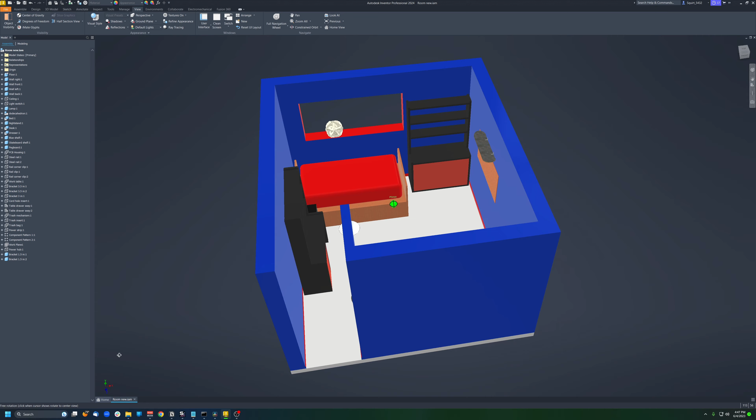Now I have actually modeled out this entire room in Autodesk Inventor, and I've used that for several purposes, but one of the biggest ones is figuring out how to design this thing.

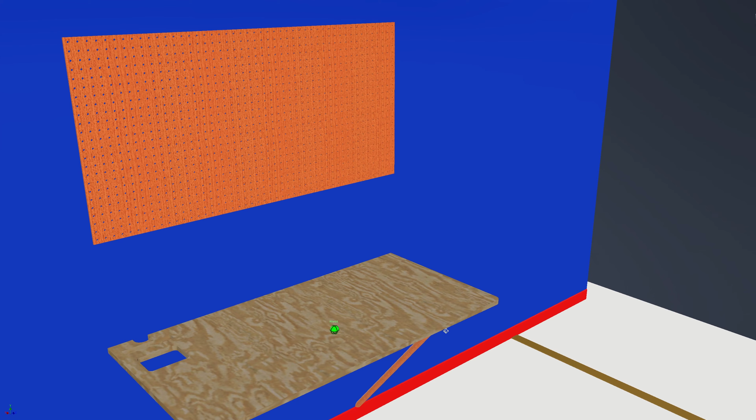I gave you a little teaser of this in my 2022 update video, but here's a little more in-depth look at the plan. Ultimately, I'd like to just leave the pegboard where it is on the wall, and then use a big piece of plywood with the exact same 2x4 foot dimensions as the pegboard for the main work surface. And then to maximize the space around the table and on the floor, I can mount it directly to the wall and then put the legs at a diagonal with the bottom just wedged into the trim here.

Making sure everything is drilled into studs, of course. And the model here is accurate to the measurements I took for where the studs are on the wall.

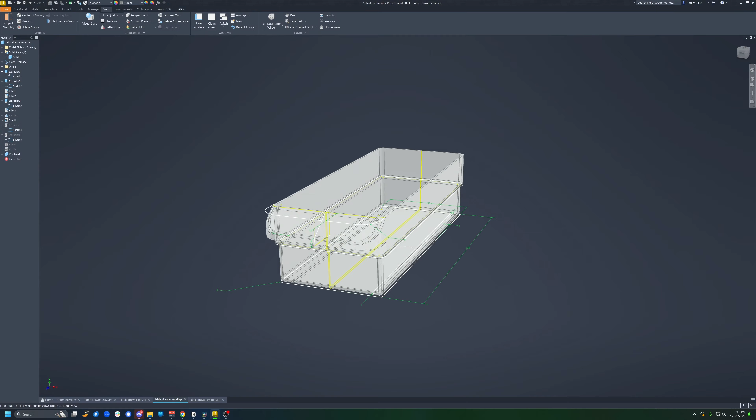I then found these great drawer systems on Amazon, and I had to get these in the model, so you know what time it is now. It's time to make an unnecessarily detailed CAD model.

So now that we've got these looking gorgeous, we can just plop them in here and make the table just the right height so that they fit perfectly flush with the pegboard.

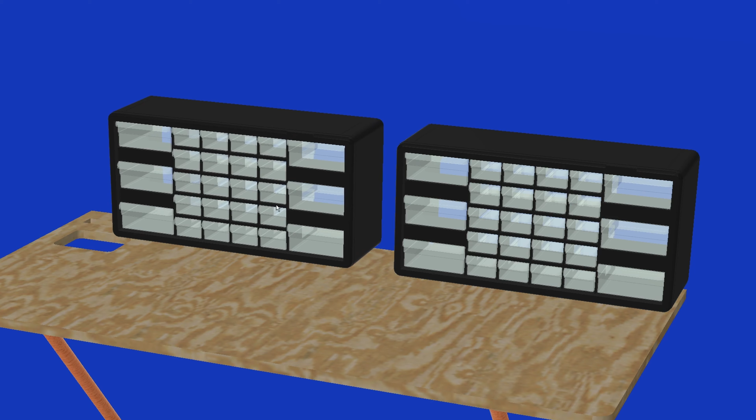Now, horizontally, these don't actually fill up the whole back wall, but if I smush them to one side so they're all nice and flush here, that leaves a nice little space for a cutout here.

So the plan is to have just a big hole in the table with a mini garbage bag in the bottom that I can just sweep trash into from the whole table.

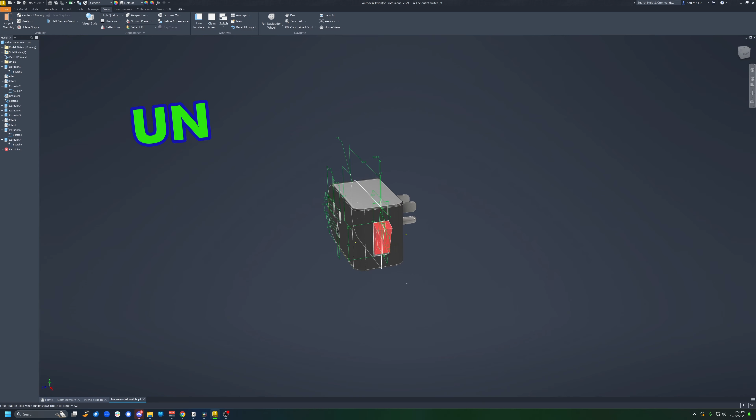And then behind that, I want to have at least 4 power switches to control things like lights and power tools. I found these little switch blocks on Amazon, as well as a power strip that should fit them perfectly, as shown by yet another unnecessarily detailed CAD model.

This seems safe, right? And each one of the switch blocks is going to go to one of these right angle adapters so that it can be pushed as far back as possible.

And I'll also have a semicircle cut out in the very back so that I can thread cables through it, and one of those is going to go directly from the power strip to this power hub, which I can mount to the wall to be more accessible for non-permanent things. That looks like a plan to me!

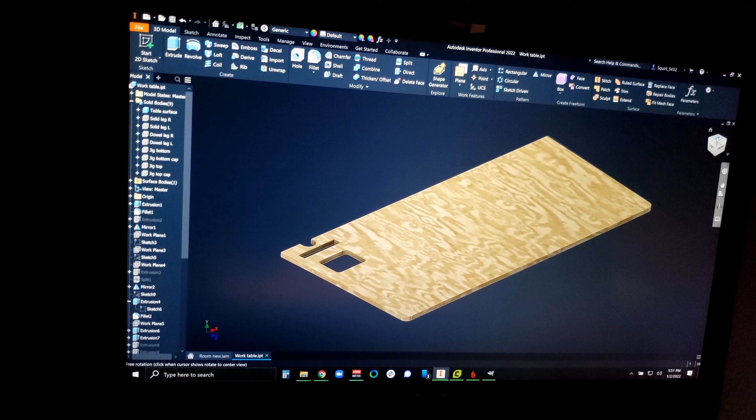Now the first step here is going to be that main cutout, so let's just screenshot that from the model, put it into GIMP to remove the background and make the outline black, then put that into Google Docs so that I can make sure to print it at the right dimensions, which I can just take from the model here, and transfer that number over to the dimensions on the image.

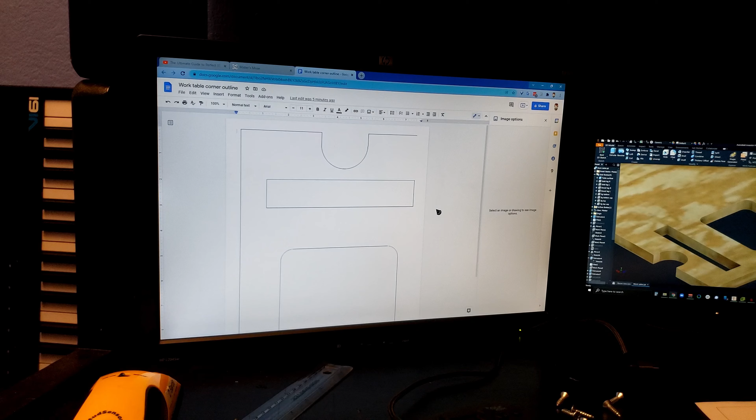And there we go! Now let's cut some things! That's actually a really nice curve.

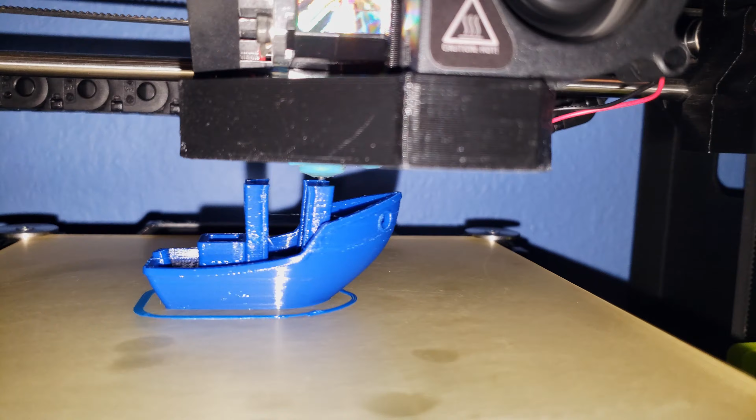Something else I mentioned in my 2022 update was that my 3D printer needs work again. Hopefully it'll be easier this time. Thankfully, it was in fact easier this time. If you're wondering what I mean and how it went last time, you can watch the video I made on that, where it was such an ordeal that I made an entire music video to recount everything. But for now, I can finally use it to print the mechanism for the trash bag under the table. I went through a few iterations of this mechanism, but finally ended up with something that slides in beautifully, slides out beautifully, and you can just put a little doggy bag in here and wrap around the edges, and that fits perfectly. It's amazing and I love it.

So let's start assembling some things on the actual table.

It was at this moment that he knew.

Wait, frick. I didn't mean to go all the way through. Future Davis here, just interjecting to say that mistake did actually make it to the final version because I couldn't be bothered to fix it. Back to you, past Davis, you idiot.

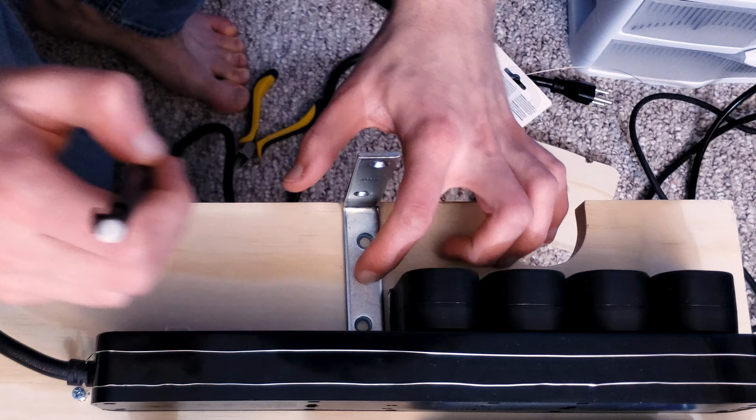And that, kids, is why we measure everything to the tenth of a millimeter. Look how beautiful that is. Oh, I love CAD modeling.

That was terrifying.

Now that pretty much everything is in place, I want to test the strength on this thing, so I did a bit of a weight test to make sure the table itself is not the weak point here. I think it's safe to say that's a success.

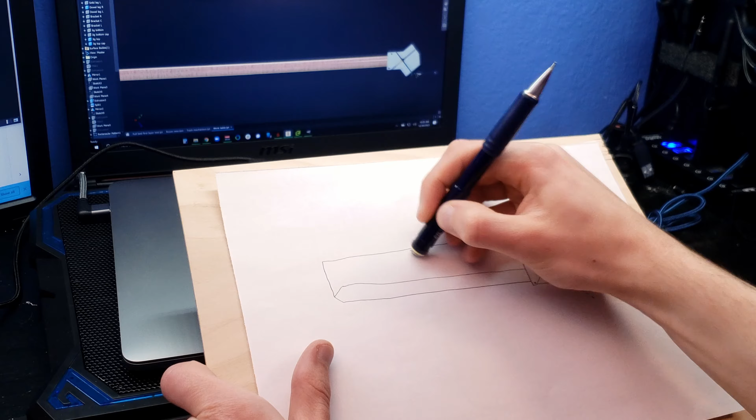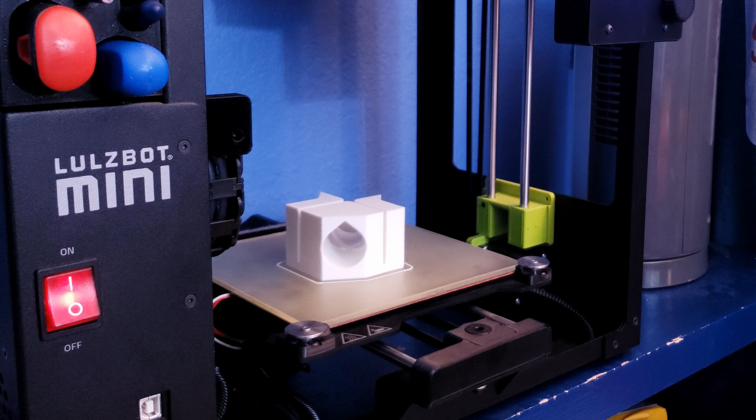With that done, it's finally time to move on to the legs. I'm just going to use dowel rods for these, but the ends need to be cut at a very precise length and at very exact angles. There are tools that would make those cuts easy, but I don't have them. I have a jigsaw and a 3D printer. What do you do when all you have is a jigsaw and a 3D printer? You 3D print a jig for the jigsaw.

Not too shabby. Now it's time to mark some things, drill some holes, and get this whole thing on the wall.

And now, please join me in getting every telescopic thing I own to use as a jack to hold up the table as I mark the holes and get stuff mounted and everything. Because since I'm mounting it directly to the wall, it basically needs to be suspended mid-air so that I can mark the holes. So, DIY suspension rig, or whatever that could be called. And now, quite possibly the trickiest maneuver I will pull for this entire project.

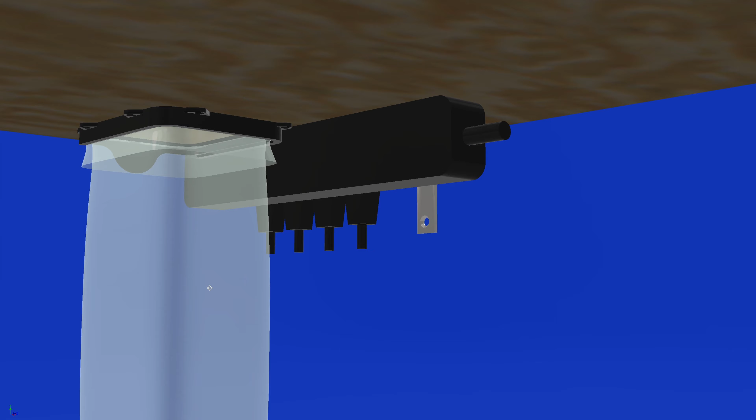Once I make sure the table is actually in position, perfectly centered and perfectly level, I can mark those holes in the brackets where I need to drill into the wall. Now the tricky part: I could drill those just in place, and those two would be fine, except for that one, because the power strip is in the way. So I think I'm going to need to place the brackets first, then put the table back on top, and screw in the brackets from the bottom.

Yeah! First order of beeswax. Let's get this back on the sawhorses where it belongs. A bit more stable. Yeah, boy! And now we drill some holes.

Alright, moment of truth number one. Success! Now the real question is, do the brackets still line up with the table?

It was at this moment that he knew. Note to self, that is not load bearing yet. Frick, frick, frick, frick. Back up.

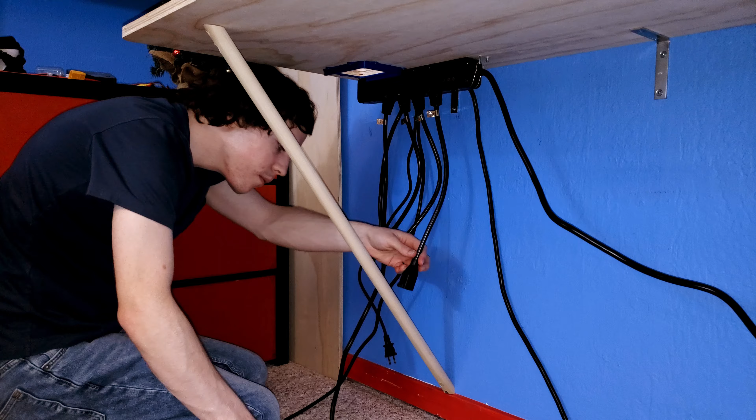So as I'm plugging things in here, the idea is I can have stuff on these switches like my jigsaw where it's always plugged in, but if the switch is off, I can pull the trigger and it won't do anything. When I turn the switch on, now we have a jigsaw. Same goes for my rotary tool where it won't do anything until I turn the switch on.

And now Dremel go brr! I can also just leave the tool on and use the back power switch as the main switch if I want. Probably won't do that very much, but it's a thing I can do. Finally, we can stick the trash bag in, which is looking lovely.

We can put the drawer systems in place, and those are just perfectly flush. And things are finally starting to look like the model.